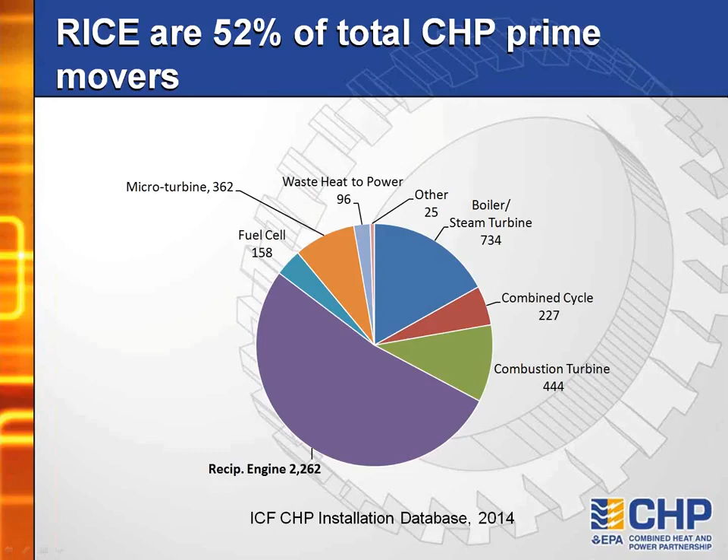As you can see from this slide, reciprocating internal combustion engines, which we'll refer to as RICE today, are over half of the CHP prime movers currently in operation. We have learned from our stakeholders that there's a high level of interest in EPA's regulations covering these engines. I also want to thank my EPA colleagues who will be making today's presentations, and I'll be introducing them one by one later. We have Roy Crystal, Melanie King, and Susan Lancy.

Today we'll be starting with Roy Crystal, from EPA's Region 1, who will talk about how EPA air quality regulations affect combined heat and power facilities. He'll be followed by Melanie King from EPA's Office of Air Quality Planning and Standards, who'll talk about the regulations for stationary RICE. That'll be followed by a question and answer session moderated by Susan Lancy from EPA Region 1, who also will probably be answering some of the questions. Then Roy Crystal will come back to talk about how combined heat and power facilities can comply with the EPA air quality regulations for stationary RICE, followed by a final question and answer session, again moderated by Susan.

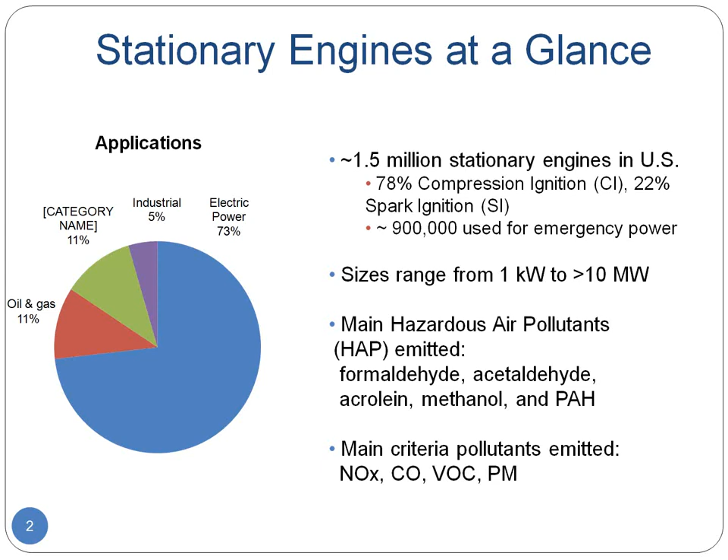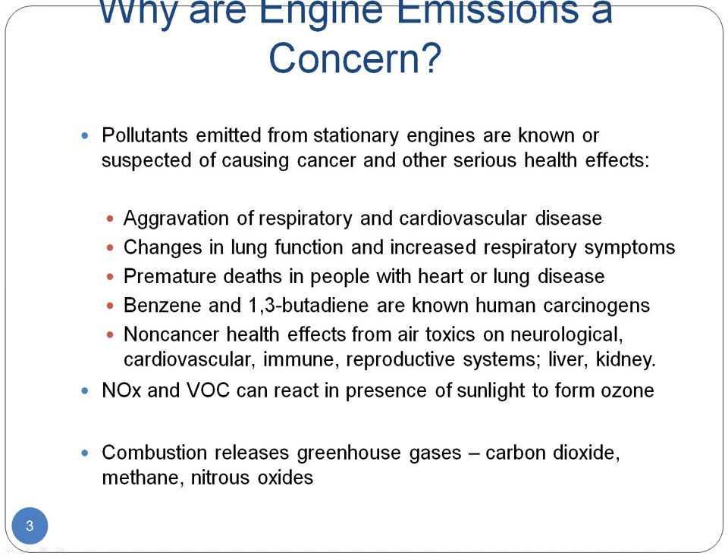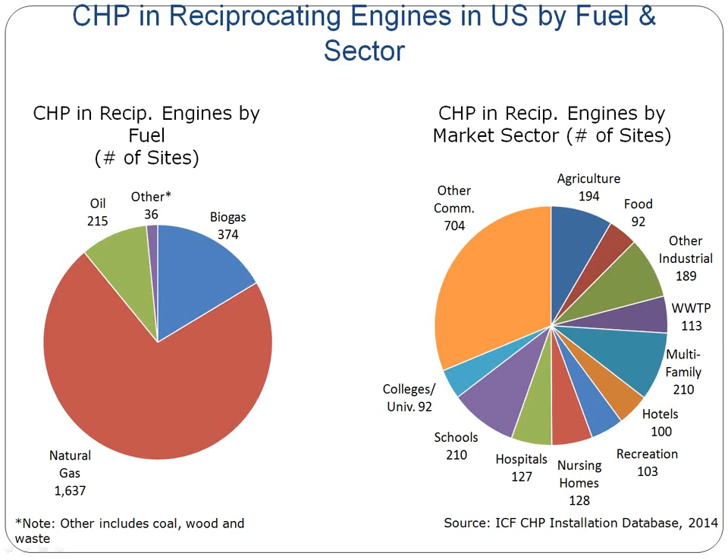So next slide, please. So how does that create an issue? Why is there something that you need to take your time today to learn about? We know that RICE are common prime movers for combined heat and power units, and we have these relatively recent stationary RICE regulations.

These apply to you if you have a RICE as the prime mover for your CHP unit, and these are relatively recent regulations. In the process of project development, facilities and consultants are used to dealing with states and going through permitting processes and talking about the air quality requirements for the facility. But they may not be that familiar with the RICE regs, which have really been coming into play over the last 7 or 8 years.

So it's possible that some of the requirements here may not have been attended to. You may not have known about them, or your consultant might not have known about them, and it's possible that you may be out of compliance. Some of the engines that are used need emission limits, need to have controls on them, and do things like performance testing and submit notifications to EPA. If that is your situation, it's a cause for concern, but we're here today to show you what to do to come into compliance with the regulations, and you may well learn that you are in good shape.

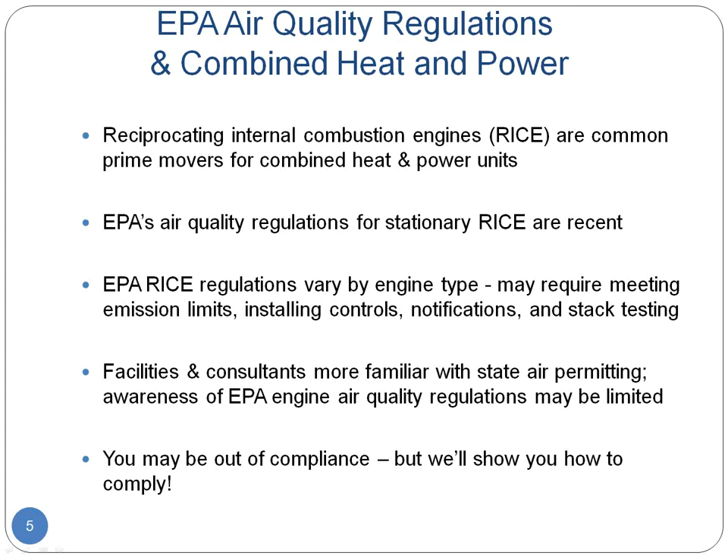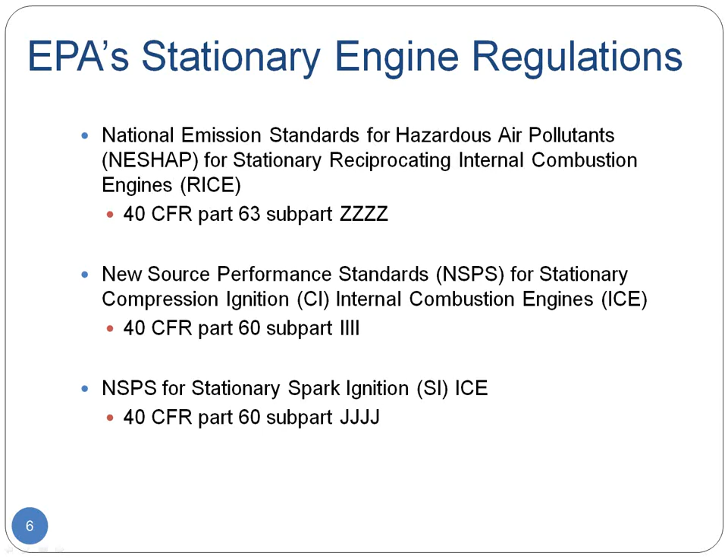Next slide, please. So there are 3 basic regulations that are part of our RICE regulations. The first is what we call the NESHAP, National Emission Standards for Hazardous Air Pollutants for stationary RICE. And then there are 2 new source performance standards, one for what we call compression ignition, CI or diesel engines, and one for spark ignition or SI engines. Next slide, please.

Let me give you an overview of these regulations. The first one, the RICE NESHAP, is probably the most sweeping. It regulates hazardous air pollutant emissions from stationary RICE at both major and area sources of hazardous air pollutants, which are listed in the 1990 amendments to the Clean Air Act. There's a couple hundred of these hazardous air pollutants, and all sizes of engines are covered, both new and existing RICE. So it's pretty sweeping. However, with the newer engines, it defers to the new source performance standard.

We've worked to bring these two sets of regulations together, and you'll be hearing from Melanie King, the rule writer for these regulations. She'll explain how they fit together. The new source performance standards really cover the new, modified, and reconstructed sources. They don't cover existing sources, and they cover the criteria pollutants, like nitrogen oxides, not the toxics. They begin to phase in for different types of engines starting in 2005. Over time, as more new engines are put into play at CHP units and elsewhere, the new source performance standards will become more pervasive. Right now, there's a big backlog of existing engines regulated under the NESHAP.

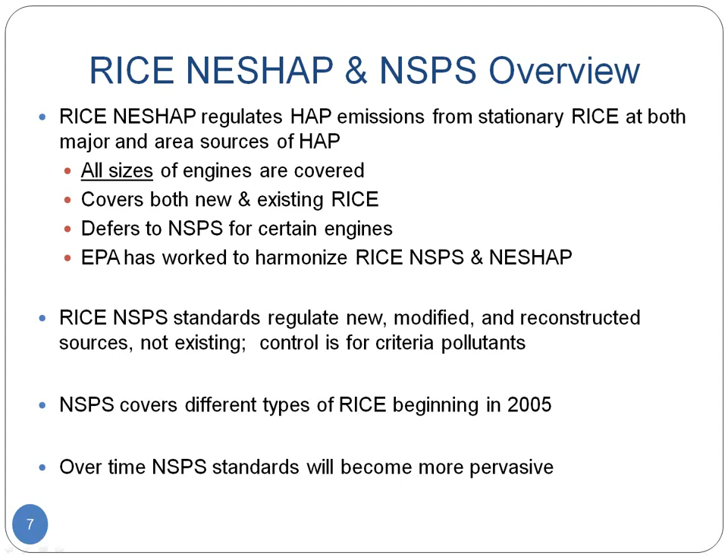Next slide, please. So what are the possible uses of RICE, or reciprocating engines, at a facility that has a CHP unit? Well, the first and obvious one is it may be the prime mover for that CHP unit, the thing that produces the energy. In our RICE reg world, that's a non-emergency use, because you want that CHP unit running pretty much all the time to be cost effective.

But as a facility, you may have engines you use for other things, so we're not just going to focus on CHP today. We're going to give you the broad sweep of our RICE regs. Most of you probably have an emergency generator — remember from the first slide, that was the most common use — used for generating backup power in an emergency. Our EPA RICE rules, for the first time, bring out a kind of national uniform framework for use of emergency generators, and we're going to tell you what those require.

A third circumstance is somebody may be paying you to use your generator. In our lingo, that's a financial arrangement for use of the engine, and there are a couple of different flavors of that. It may be used for what's called peak shaving, which is really load management — economic or situational — or for emergency demand response, which is close to a blackout situation, as Melanie will explain more, or for situations to foster local grid reliability.

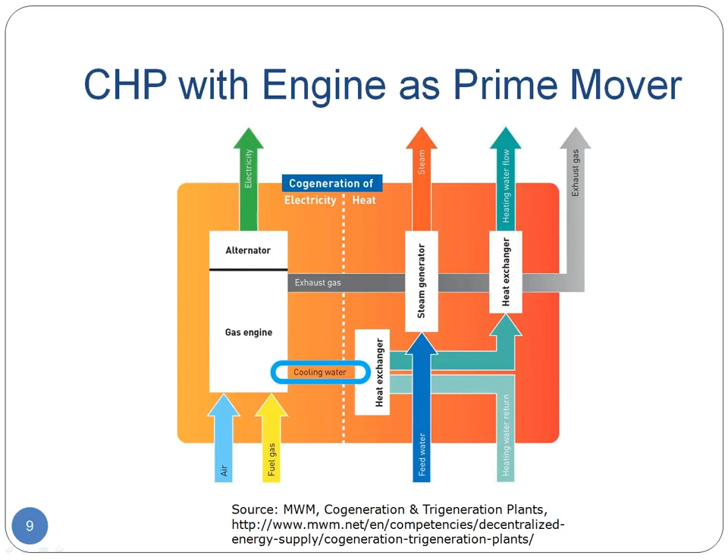So with that, that's kind of an introduction. Melanie King is now going to talk to you about the specifics of these regulations, so we'll switch the screen over to Melanie. And I'm just going to briefly introduce Melanie.

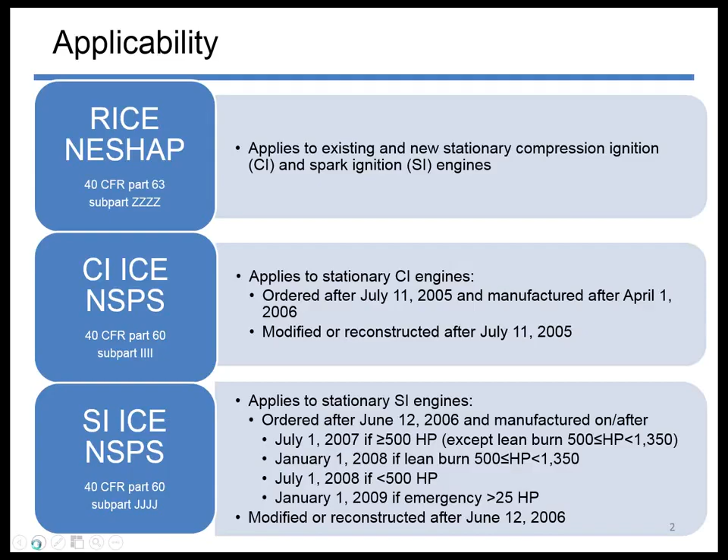What do we mean when we say stationary? We're basically talking about things that are not mobile. So our stationary engine regulations apply to things that are not mobile, and mobile means things used in motor vehicles, and mobile non-road equipment. Most people know motor vehicles, but mobile non-road engines would be anything self-propelled, like a tractor, propelled while performing its function, like a lawnmower, or anything portable or transportable, meaning it's on a trailer or a skid. If an engine falls into one of those three categories, it's considered a mobile non-road engine and would not be subject to our stationary engine requirements.

The way the regulation is written, it says if an engine is used in or on a piece of equipment that is self-propelled, for example. So if you have an engine mounted on equipment that's self-propelled, even if the engine is not actually doing the propelling, the fact that it's on a piece of equipment that is self-propelled means it's generally considered to be a mobile non-road engine.

One thing to keep in mind for that third category, the portable or transportable engines: if the engine remains in the same location for more than 12 months, or for the full annual operating period of a seasonal source, then it will be considered a stationary engine. And it will be considered stationary from the time it started remaining there, from the beginning of the 12 months - it doesn't become stationary only once it stays there for 12 months.

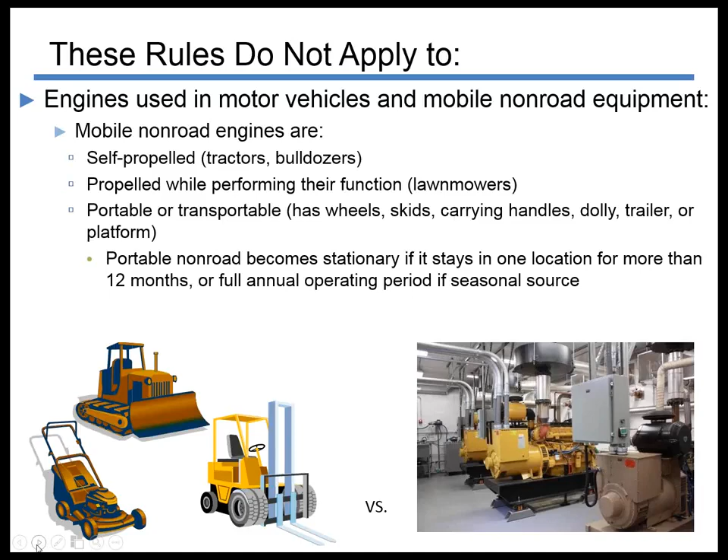So I'm going to talk about the three different regulations, and I'm going to start first with the NESHAP.

Just to give you a little background, the NESHAP regulates emissions of hazardous air pollutants from engines at both major and area sources of hazardous air pollutants. A major source is a facility that emits 10 tons or more per year of a single HAP, or 25 tons or more per year of combined HAP. It wouldn't just be the engines that we'd look at to consider if something is a major source—it's all the stationary emission sources at the facility. So if an engine is located at a refinery or a power plant, you'd look at the emissions from all the emission sources there when determining whether a facility is major or area source. An area source is any source that's not a major source.

So if you're not a major source, you're going to be an area source—you'll fall into one or the other category. Even if all you have at your facility is the stationary engine and no other HAP emission sources, you're going to be an area source. So if you've got a stationary engine, you're going to, at a minimum, be an area source. My thinking is that most of the engines used for CHP are probably going to be located at area sources. So what we're going to focus on today for the NESHAP is the requirements for engines at area sources, but I did put some slides at the end as an appendix that cover requirements for engines at major sources.

The rule does cover all sizes of engines. There's no threshold below which an engine would not be subject to the rule. The only stationary engines not subject to the NESHAP would be existing emergency engines located at residential, institutional, or commercial facilities that are area sources, provided the engine is used or obligated to be available less than 15 hours per year in financial arrangements such as an agreement with a utility for emergency demand response or voltage frequency deviations, and not used for local reliability. Some folks have been a little confused about that language.

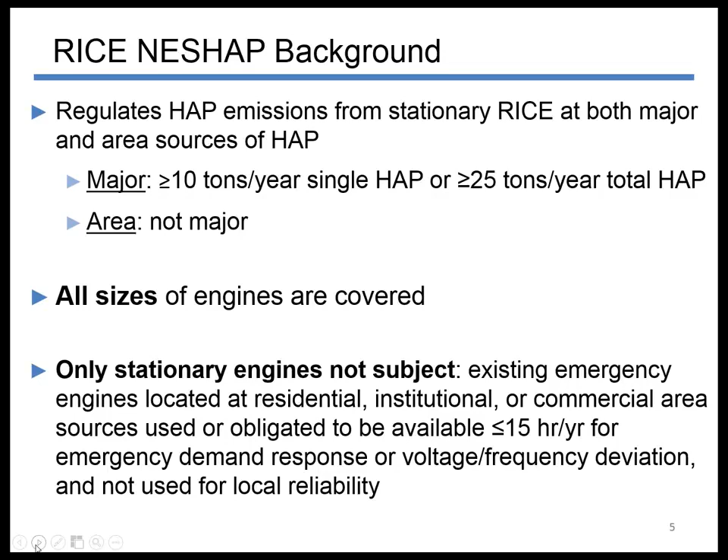The requirements in the rule differ for engines depending on things such as the category of the engine—like Roy was talking about, lean burn, rich burn—and the size of the engine, and also whether the engine is considered existing or new. For engines greater than 500 horsepower at major sources, it's existing if construction commenced before December 19th, 2002. If the engine is less than or equal to 500 horsepower at a major source of HAP, or any size at an area source of HAP, it's existing if construction commenced before June 12th, 2006.

The way we define construction actually defaults to a definition in subpart A of part 63. I've paraphrased it here, but it's essentially when the owner-operator of the engine has entered into a contractual obligation for the on-site installation of the engine. That would be the construction date of the engine.

Note that the definition says construction does not include removal from one existing location—I'm paraphrasing—and moving it to a new location. So if you have an engine at a facility that's been operating there, and you pick it up and move it to another facility, with or without a change in ownership, that doesn't change the construction date of the engine. You need to look at the date construction commenced when it was a brand new engine.

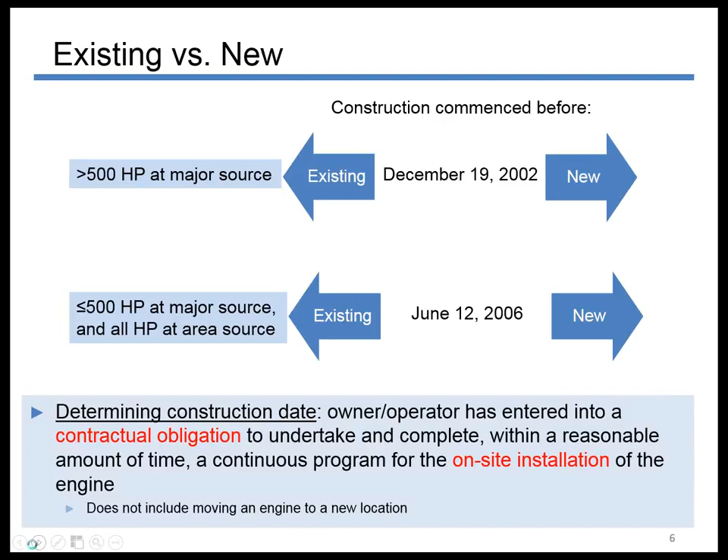So that's a little bit of background. Now I'm going to go into the specific requirements, and I'm going to start with the non-emergency engines at area sources of hazardous air pollutants.

But there is a CO standard for compression ignition engines above 300 horsepower - either a parts per million or a percent reduction standard. And for spark ignition four-stroke engines above 500 horsepower that are not in remote areas, if the engine is used more than 24 hours per year, we have what we call an equipment standard.

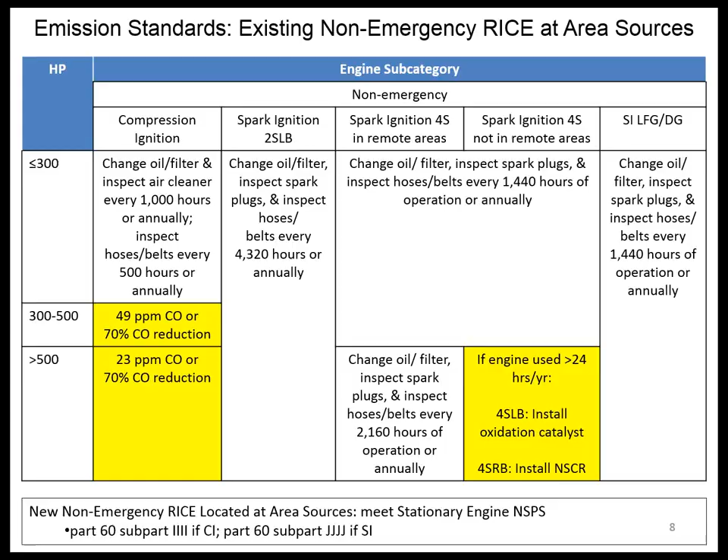So those were the emission standards. Here are the compliance requirements. If you have one of these existing non-emergency compression ignition engines above 300 horsepower that is subject to a CO limit or formaldehyde, percent reduction or ppm limit, you will have to do a performance test.

You have to do an initial test, and if your engine is above 500 horsepower, you have to do a subsequent test every 8,760 hours of operation or 3 years. Or if you only use your engine less than 100 hours per year, the interval can be 5 years.

In addition to the testing, you will have operating limitations on your engine. The rule specifies that the catalyst pressure drop and the catalyst inlet temperature have to stay within a certain range. You have to do a monthly check of the catalyst pressure drop, and you have to continuously monitor your catalyst inlet temperature, if your engine is above 500 horsepower.

You also have to submit some notifications to EPA or, in some cases, your state or local air pollution control agency. You have to submit semi-annual compliance reports - again, if you have a limited use engine, you can do those annually. The engine has to use ultra-low sulfur diesel, and there are also some crankcase emission control requirements.

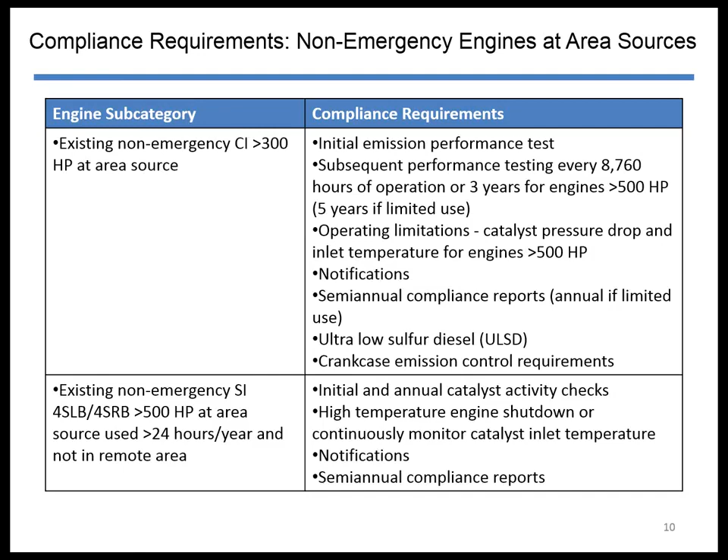If you have one of these existing spark ignition 4-stroke engines above 500 horsepower at an area source that's not in a remote area, these are the engines that have to meet the equipment standard to install a catalyst. You would have to do an initial and an annual catalyst activity check.

You have to equip the engine with a high temperature engine shutdown or continuously monitor your catalyst inlet temperature, and you will also have to do notifications and compliance reports. If you have one of the engines only subject to what we call the management practices, essentially the maintenance requirements, change the oil, inspect hoses, belts, etc., I've listed these engines here. What you need to do for those engines is just operate and maintain the engine per the manufacturer's instructions or your own maintenance plan.

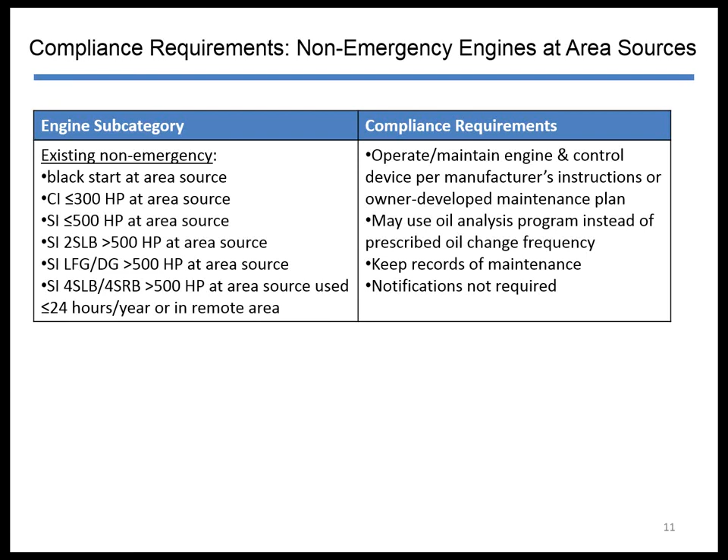You can use an oil analysis program instead of changing the oil on the prescribed frequency. You have to keep records of maintenance. You do not have to submit notifications to EPA. This is a little more information about the oil analysis program.

The rule specifies certain parameters, and then at whatever interval the rule specifies for your oil change—say, 1,000 hours—you would do that analysis at or before the 1,000 hours, and look at these parameters. If the condemning limits had not been reached, then you would not need to change the oil, and you would go to the next interval and do the analysis again, and so on.

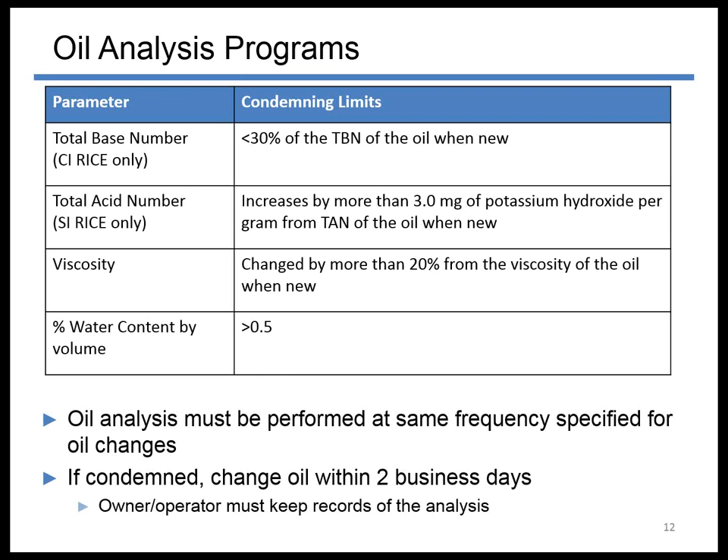Once you do reach the condemning limits for the oil, the rule specifies that you have to change the oil within 2 business days, and you do need to keep records of the analysis. So those are the requirements for non-emergency engines.

Those are by no means the only situations where an engine can be operated and be considered an emergency engine—those are just some examples. We also say that the engine must limit its operation in non-emergency situations as specified in the rule to be considered an emergency engine. Here's some more information about that—these are the limits that are in the rule.

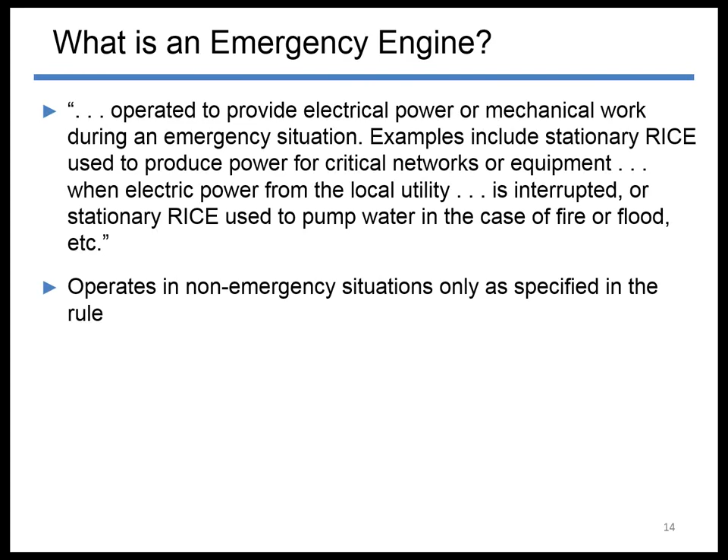There's no limit on the operation in an emergency situation. So if an ice storm comes and takes out the power lines, or a hurricane, or an earthquake or something like that, there's no limit on operating the engine in that type of situation. Then there's a limit of 100 hours per calendar year that can be used for maintenance and readiness testing of the engine.

You can use the engine for emergency demand response if an energy emergency alert level 2 has been declared by the reliability coordinator. That was the operating in a financial arrangement type of situation that Roy mentioned. You don't have to use your engine for emergency demand response in order to be considered an emergency engine. We're just saying that if you do use it in a financial arrangement, you have to keep it under these limitations in order to be considered an emergency engine.

So there's emergency demand response, and then there's the voltage or frequency deviations of 5% or greater below the standard. We also say that up to 50 of that 100 hours per calendar year can be used for a couple of different things, one of which is non-emergency situations if there's no financial arrangement. An example would be some folks wanting to turn on their engines if there's a storm in the area.

Because they don't want any sort of blip in the power, it's sort of a just-in-case the power goes out type of thing. Our view has been that this doesn't really seem like an emergency situation, but it would be allowed for up to the 50 hours per year for non-emergency situations. So there's that category, and then there's this other type of financial arrangement.

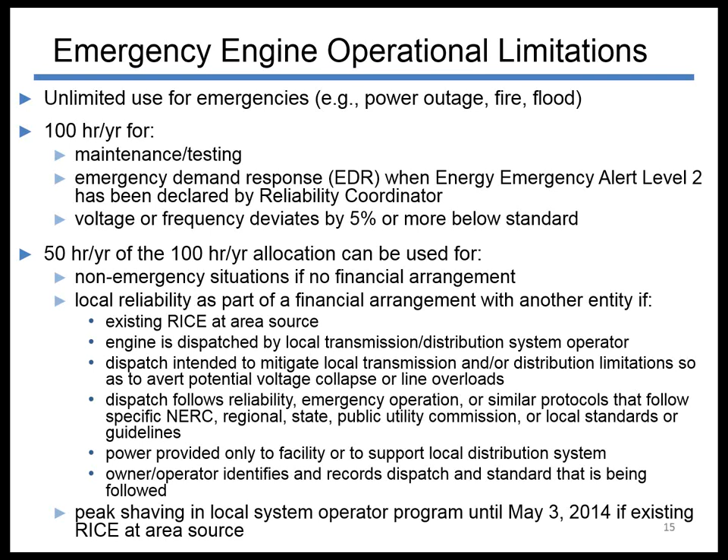We do have some compliance requirements for these engines. We have maintenance requirements similar to what we talked about for non-emergency engines: change the oil, inspect hoses and belts every 500 hours or annually, inspect the air cleaner or spark plugs every 1,000 hours or annually, whichever comes first. Again, you can use an oil analysis program. You have to operate and maintain it per the manufacturer's instructions, minimize your time spent at startup and idle. You do need to have a non-resettable hour meter and keep records of your hours of operation and maintenance. Again, notifications are not required for these engines.

If you have a new engine, similar to what we talked about for non-emergency engines, you need to meet the NSPS, and that's your only requirement under the NESHAP.

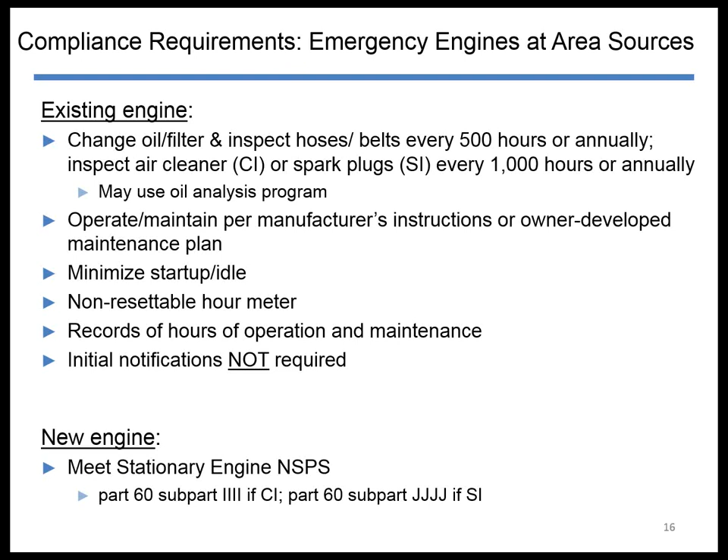We do have fuel requirements for certain emergency engines. If you have an emergency compression ignition engine above 100 horsepower, less than 30 liters per cylinder displacement, and you are operating that engine in a financial arrangement for emergency demand response, voltage frequency deviations, or local reliability, then beginning January 1st of 2015, you are required to use ultra-low sulfur diesel fuel in the engine. We did specify that any existing inventory you have on hand beginning January 1st of 2015 can be depleted.

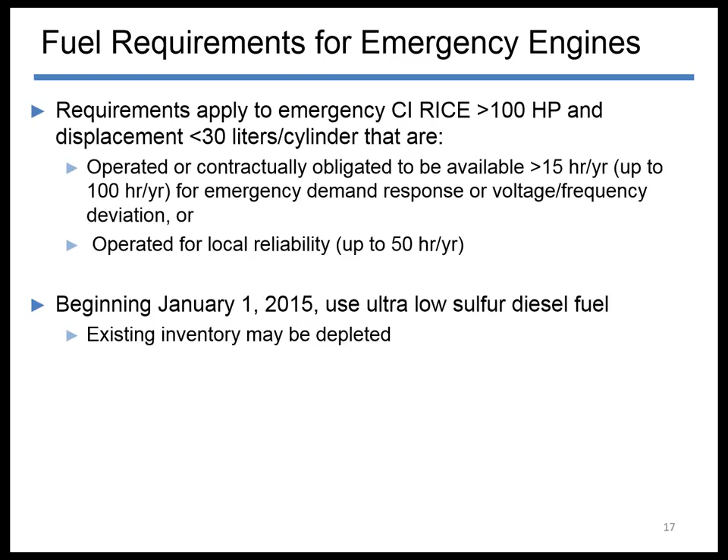In addition to fuel requirements, for those same emergency engines being used in financial arrangements for emergency demand response, voltage frequency deviations, or local reliability, if that engine is above 100 horsepower, we have a reporting requirement that begins with operation in the year 2015. You're going to have to report to us information like the facility name and address, the dates and start and end times you operated for these situations, and several other things. So the first report will have to be submitted by March 31st of 2016, then March 31st of 2017, and so on.

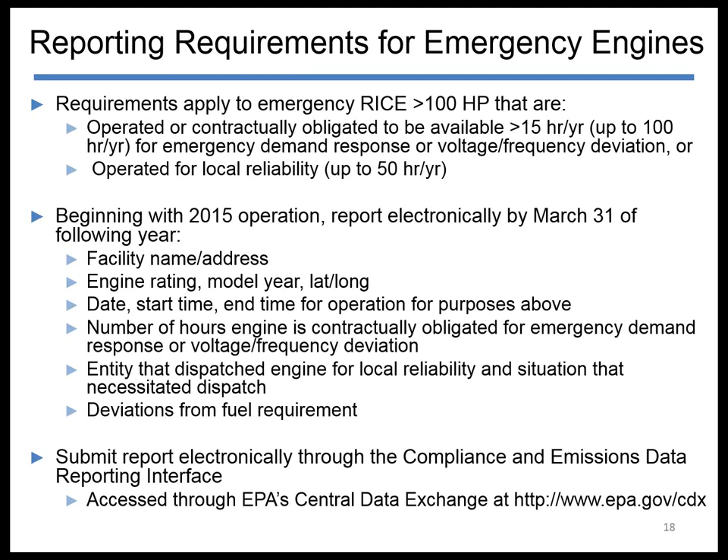We are setting up a way that you would be required to submit it electronically through our electronic reporting interface. We're still working on getting that set up, but the plan is to have that all set up by the end of this year so that we'll be ready to go when 2015 and 2016 roll around. So those are the reporting requirements.

Some key dates: if you do have an engine where an initial notification was required, it's not required for all of the engines, but it is for some, generally those that have to submit or that are subject to a CO limit. We're well past the date for submitting those initial notifications; that was in 2010 or 2011. The compliance dates...

For the existing engines located at area sources of hazardous air pollutants, the compliance date for compression ignition engines was May 3rd of 2013. For spark ignition, it was October 19th of 2013. So if you're just now realizing that you have an engine that may be subject to these requirements, be aware that the compliance date has passed, so you need to come into compliance as soon as possible. If you have a new engine, then you do have to comply upon startup.

So that's an overview of the NESHAP.

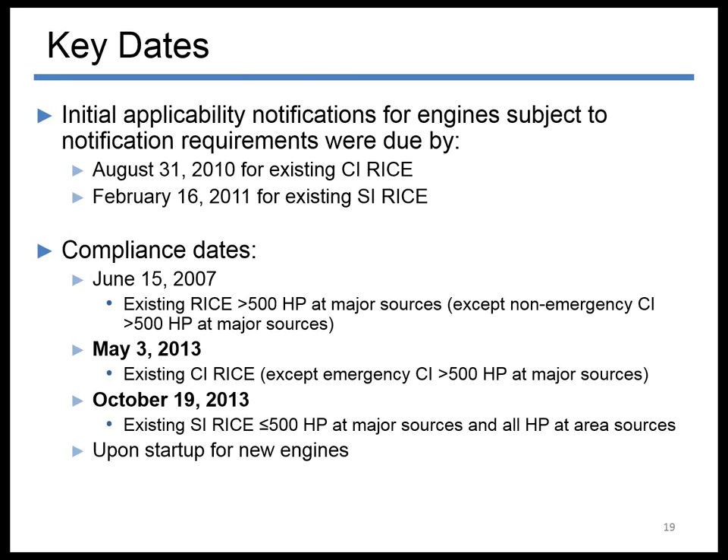I'm going to move now into the NSPS for compression ignition engines. The applicability of this rule: it applies to owners and operators of stationary compression ignition engines that were ordered after July 11th, 2005 and manufactured after April 1 of 2006, or July 1 of 2006 if it's a fire pump engine.

One thing I wanted to draw your attention to is that in the NSPS we define construction differently than we did in the NESHAP. If you remember, in the NESHAP it was when the owner or operator entered into a contractual obligation for the on-site installation. In the NSPS, we define construction as the date the engine was ordered.

So it applies to those newly manufactured engines, and then it also applies to older engines that are modified or reconstructed after July 11, 2005. Modification, in simple terms, is when you've increased the emissions of a regulated pollutant. Reconstruction is if you replace enough components of the engine such that the cost of the new components exceeds 50% of the cost of a comparable entirely new engine.

There's more regulatory text associated with modification and reconstruction. If you want to review that, it's in subpart A of part 60. There are a lot more qualifications and things like that, but it's in subpart A of part 60.

So the rule applies to both the owners and operators, and then it also applies to engine manufacturers - manufacturers of 2007 model year and later stationary compression ignition engines. The regulatory definition of manufacturer is any person who manufactures an engine for sale or otherwise introduces it into commerce, and it does include importers who import stationary engines for sale or resale.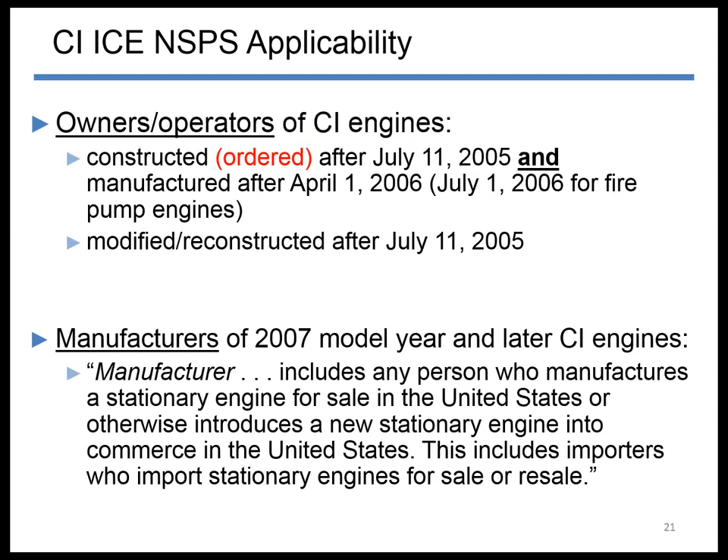So if you're buying new engines, they should be labeled, and they should have a certificate of conformity. We don't post the certificates on our website, but we do post some spreadsheets that list all the engine families that were certified by model year, so that information is available. So that's the requirements for manufacturers.

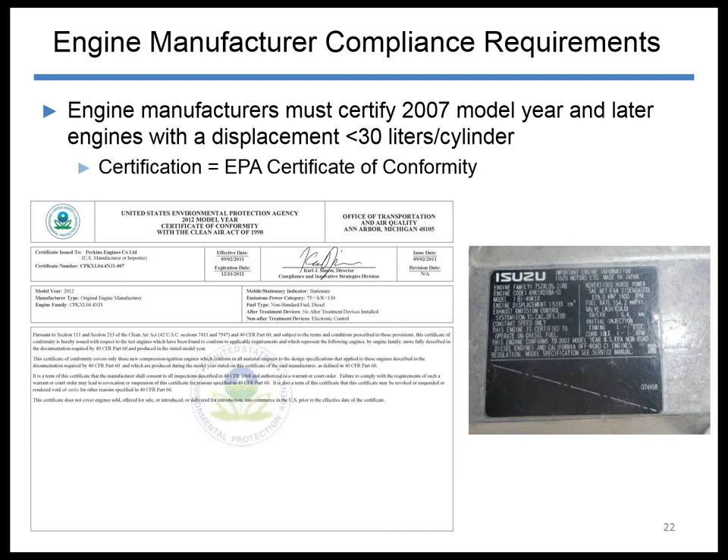For owners and operators, if you have a 2007 model year and later engine, you need to be purchasing an engine that's certified - again, certified meaning Certificate of Conformity from EPA. And it needs to be certified to the emission standards that apply to that engine based on its model year, its size, and its application, meaning emergency or non-emergency.

So if you are buying one in the 2007 to 2010 model year, it has to meet what we call the Tier 3 standards - those are for CO, hydrocarbons, NOx, and particulate matter. If you're buying one in the 2011 to 2013 model year, it has to meet at least our Tier 4 interim standards - again, CO, hydrocarbon, and NOx didn't change, but the PM standard is tighter. And if you're model year 2014 and later, the engine needs to meet our Tier 4 final standards - CO doesn't change, but the PM, hydrocarbon, and NOx are lower.

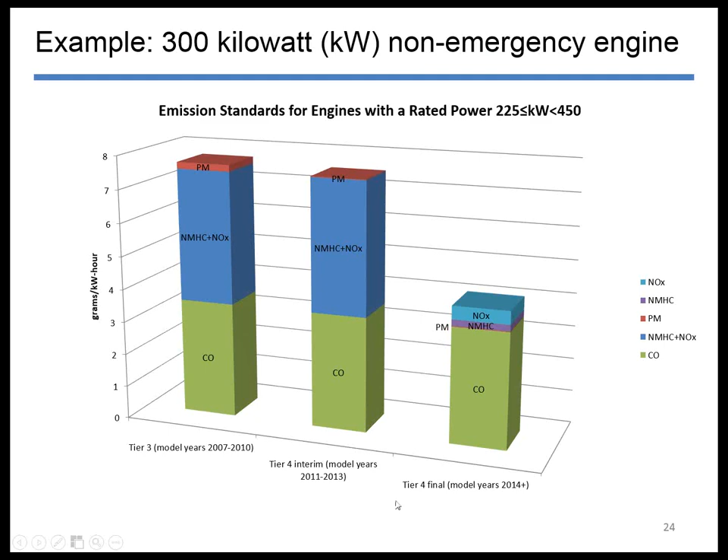So if you hear the tier terminology, that's just what we call the standards - we call them the tier standards. So you need to buy a certified engine, and you need to install, configure, operate, and maintain it per your manufacturer's instructions. If you do that, you don't have to do any performance testing to show that the engine complies with the standards. If you elect to operate the engine differently than the manufacturer's recommendations, you do need to do a performance test to show that the engine complies with the standards.

One example of something you could do would be, I've heard folks are taking compression ignition engines and putting what they call bi-fuel kits or dual fuel kits on them that would allow the engine to operate on diesel fuel as well as natural gas. So if you do that to your engine, it's no longer in the configuration that was certified by the manufacturer.

So you're going to fall into operating differently than the manufacturer's recommendations, and you have to do a performance test to show compliance.

The last requirement I listed is that these engines have to use ultra-low sulfur diesel fuel. We have requirements in the rule for engines built from 2007 model year and later, since that's the most common. We also have requirements for engines built from April 1 of '06 to the end of '06, engines with a displacement greater than 30 liters per cylinder—those are really huge engines—and also modified or reconstructed engines. I didn't go over those, but just be aware there are requirements.

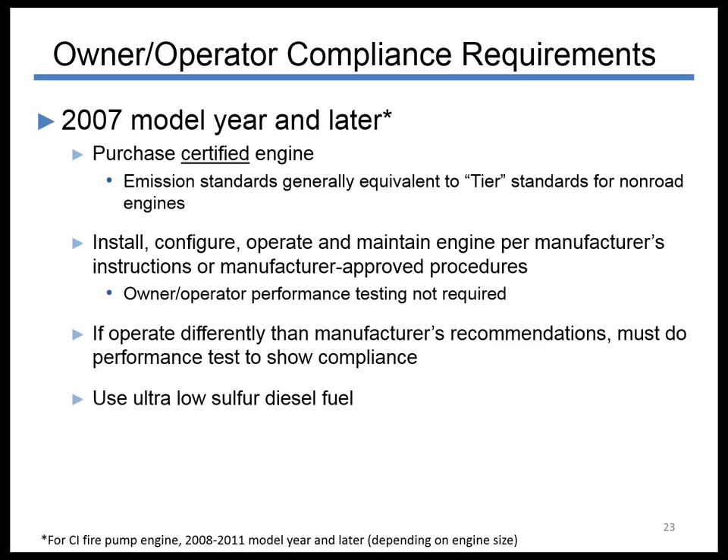So if you have one of those engines, you can check the rule for the requirements. There are monitoring, record keeping, and reporting requirements. If you have an emergency engine, you have to have a non-resettable hour meter and keep records of the hours

of operation if the engine is certified as emergency use only. If you have an engine with a diesel particulate filter, what we call a DPF, you have to have a back pressure monitor and keep records of any corrective actions.

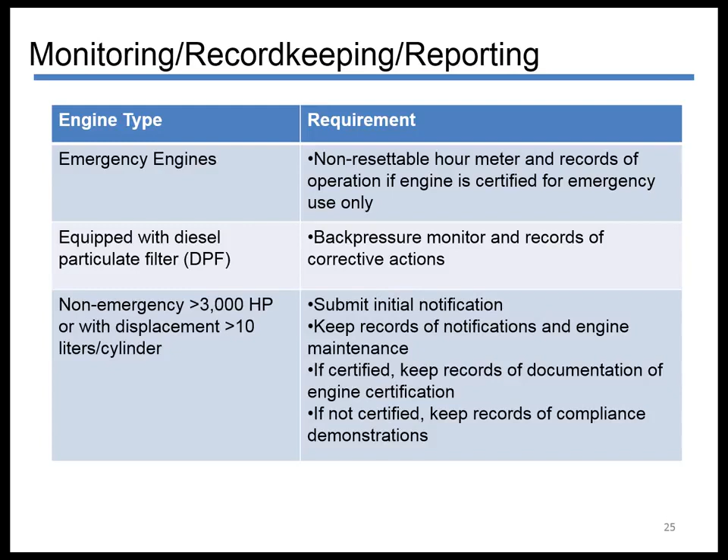If you have a non-emergency engine above 3,000 horsepower or with a displacement greater than 10 liters per cylinder, you have to submit an initial notification, keep records of that and the engine maintenance. If it's certified, keep those records, and if it's not certified—which would potentially be your 2006 model year engines, since they weren't required to be certified—you would have to keep records of whatever compliance demonstration you use for that engine. So that's the requirement for compression ignition.

I'm going to go over the spark ignition engines, and again, that would be your natural gas, gasoline, LPG, propane, landfill and digester gas engines.

This rule applies to owners and operators of spark ignition engines constructed, and again that's defined as ordered after June 12th of '06, and manufactured after the date specified in the rule for the particular category of engine. So if it's a lean burn engine, 500 to 1350 horsepower, if it was manufactured after January 1 of '08 and constructed after June 12th of '06, it's subject to the rule.

And for older engines, if they're modified or reconstructed after June 12th of 2006, they also become subject to the rule. This rule is a little bit different than the compression ignition engine rule, because with the compression ignition rule, almost all engines are required to be certified by the manufacturer.

Here, engine manufacturers are only required to certify spark ignition engines if they're less than or equal to 25 horsepower, or if they're greater than 25 horsepower and they're gasoline or rich burn LPG engines. But that leaves a whole group of engines, like natural gas engines above 25 horsepower, that manufacturers are not required to certify. I think they are certifying some, but certainly not all of the engines.

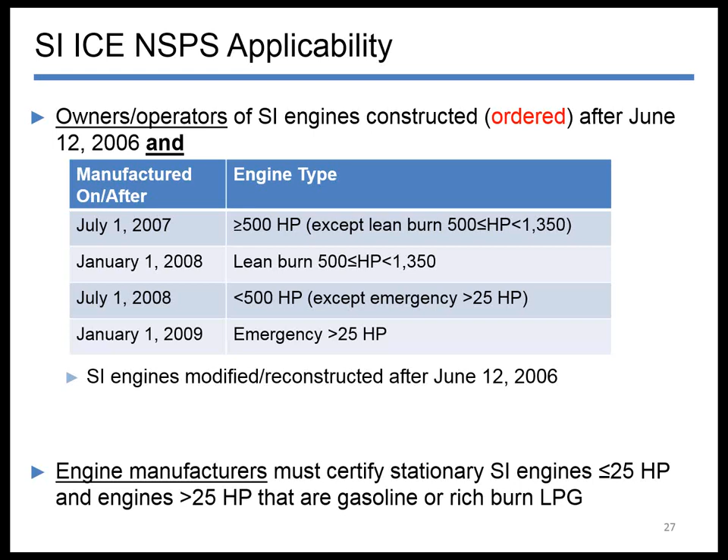Just in general, I actually find this regulation to be the most complicated. I know a lot of folks think the NESHAP is, but I find this one to be. So the emission standards, again, depend on the type of engine you have.

If it's less than 25 horsepower, the rule's going to say meet the standards that are in Part 90 or Part 1054 that we adopted for non-road engines. So we just point to standards for a comparable non-road engine and say meet those standards.

If they're non-emergency gasoline or rich burn LPG engines, or natural gas and lean burn engines 25 to 100 horsepower, our regulations point to the standards in Part 1048 and say meet those standards. If it's above 100 horsepower and it's not a gasoline or rich burn LPG engine, then the regulation says meet the standards in Table 1 of Subpart JJJJ. They're basically NOx, CO, and VOC standards.

You have the option of meeting either a grams per horsepower hour or a ppm standard, and there's a different standard depending on the model year. I think we did something kind of similar to the tiers, but we basically only have two tiers. For example, model years 2008 through 2010 have one tier, and 2011 and later have another. So that's what's in Table 1.

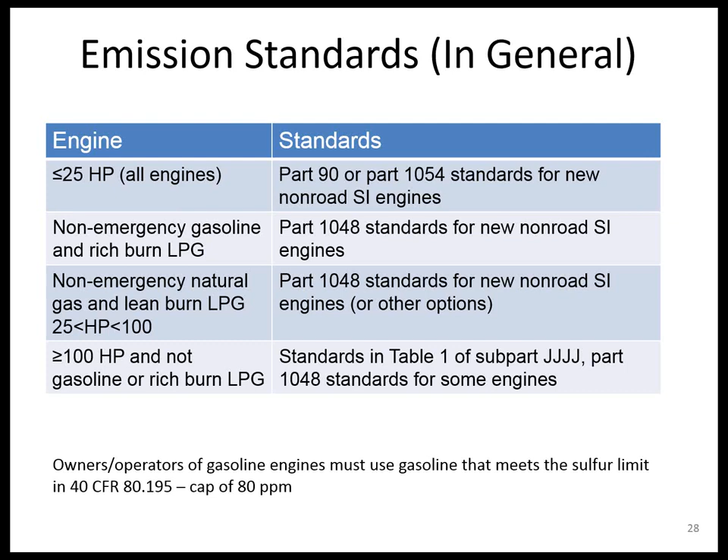In terms of compliance requirements, if you have an engine certified by the manufacturer, say it's less than 25 horsepower, similar to what we require for diesel or compression ignition engines, you have to install, configure, operate, and maintain it according to the manufacturer's instructions. If you elect not to operate and maintain it according to those instructions, you have to have a maintenance plan and operate consistent with good air pollution control practices.

If it's 100 to 500 horsepower, you have to do an initial performance test to show the engine still meets emission standards, and if the engine is rebuilt or undergoes major repair or maintenance, you have to retest in addition to the initial test. If it's above 500 horsepower, you have to do an initial test and subsequent testing every 8,760 hours or 3 years, whichever comes first. That's the requirements for engines originally certified by the manufacturer.

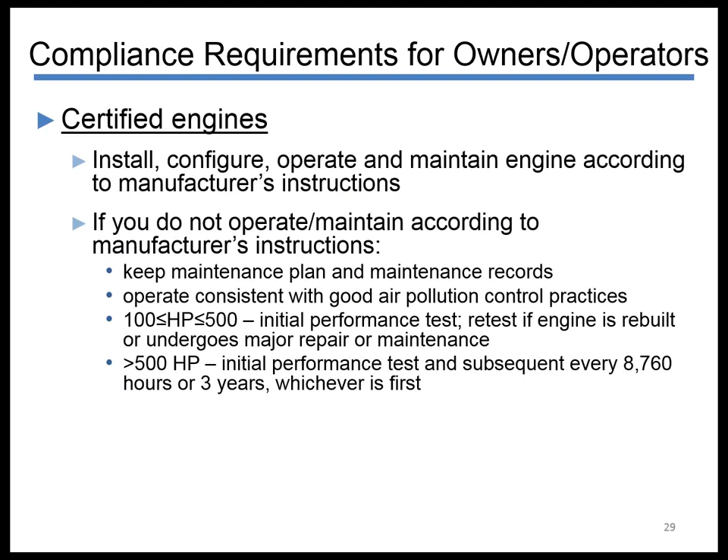If you have an engine that was not originally certified by the manufacturer, you have to have a maintenance plan and do performance testing. From 25 to 500 horsepower, you do an initial test and retest if it's rebuilt or has major maintenance. Above 500 horsepower, you do an initial test and then subsequent testing every 8,760 hours or 3 years, whichever comes first. That test does have to be done at high load conditions.

In terms of monitoring, record keeping, and reporting: a non-resettable hour meter, again for emergency engines, documentation if it's certified, and any records of maintenance. If it's an engine that's not certified and above 500 horsepower, you have to submit an initial notification. And if it's an engine for which you have to do performance testing, you have to submit those results to us within 60 days of the test.

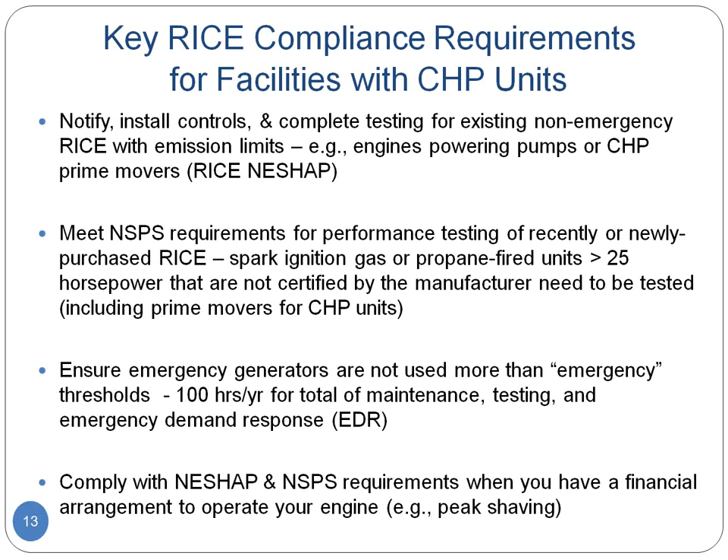So classifying your engines in terms of the key factors, we've been over these. Horsepower is a key factor, as well as the date constructed or reconstructed. You're going to need the hours of use, which means you have to start, if you haven't already, tracking your engine hours of use, or look it up. The annual hours of use in emergency and non-emergency situations, and for maintenance and testing.

You may not have been looking at this data. You've got to go out and get it. And you're going to have to look at your contract obligations and the hours of use in any financial arrangements you have for being paid for using your engine.

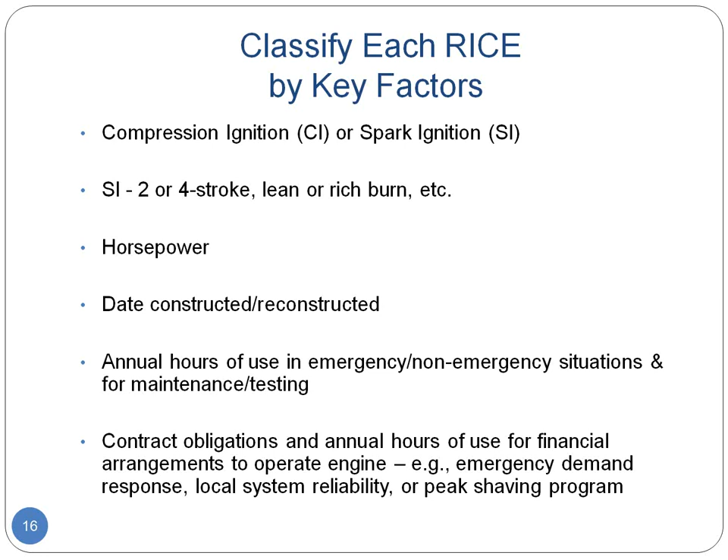Melanie mentioned how you determine if your source is major or area. A major source has a facility-wide potential to emit greater than or equal to 10 tons per year of any single hazardous air pollutant, or greater than or equal to 25 tons per year of combined hazardous air pollutants. For different sectors, we have guidance published at different locations on our website for how to calculate potential to emit, which is basically 24/7 use year round. If you are not within those major source categories, you're an area source, and that's what most of you will probably be.

So just reiterating again, the 3 or 4 circumstances that are key to be concerned about, especially if you have a CHP unit. Under the NESHAP, an existing non-emergency spark ignition 4-stroke RICE at an area source that's greater than 500 horsepower, so it's pretty big, and it's not in a remote area, has to install controls if it's used for more than 24 hours a year. That's the equipment standard Melanie spoke of. If it's a lean burn engine, it needs an oxidation catalyst, which is basically a catalytic converter. If it's a rich burn engine, it needs non-selective catalytic reduction, or NSCR. So bottom line, you might have to have controls on your engine in that circumstance with the CHP unit.

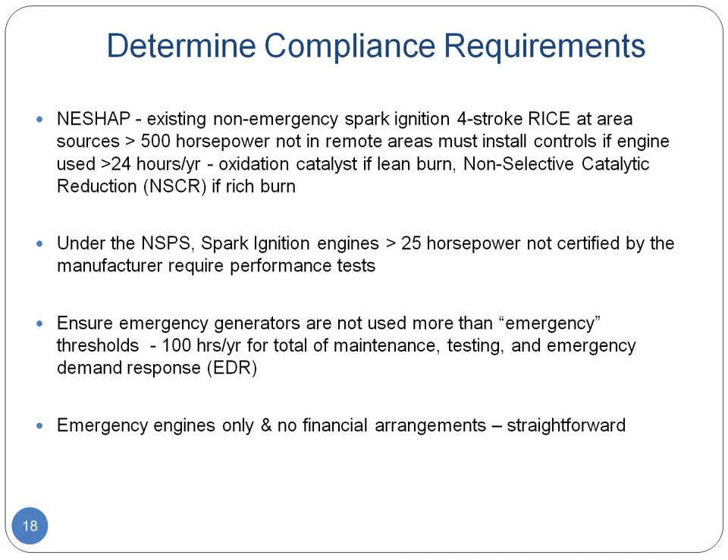When somebody is paying you to use your engine, things get a little more complicated. You have to figure out which of these different flavors of financial arrangement you have. It could be emergency demand response, which is basically a situation pretty close to a blackout. It could be peak shaving or load management, which is really more economic use of the engine, or a local reliability program. The way to find out is to read your contract.

The requirements will differ for each of these types of financial arrangements. Melanie mentioned that the allowance for 50 hours of peak shaving or non-emergency demand response for emergency engines at area sources has ended as of May 3rd, 2014.

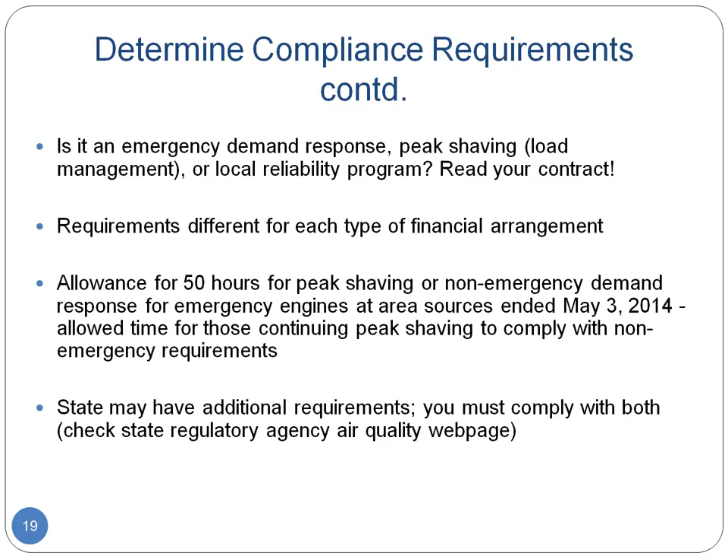So if you're doing peak shaving, you have a choice to make. If you want to continue with the peak shaving program with the utility, you're going to have to comply with the non-emergency requirements. We've been talking about the EPA air quality regs for engines here today, but states have been regulating engines for a long time, and you have to comply with both of those kinds of standards. A way to find that out is to check the state regulatory agency air quality webpage.

So we have developed a number of information sources on EPA compliance requirements. I was hoping to show you some of these after I get through the full presentation. We'll go to some of them. We've had a little problem with our computer here freezing, so I'm going to pretty much talk you through what is on the sites. And if we have time, we will show you one tool in particular, the regulation navigation tool.

The first one is epa.gov/region1/RICE. This is one we developed here in EPA Region 1. It's a user-friendly kind of guide to the RICE regs. Down the left-hand column, it shows a general description of the regulations, and we have boxes on the right-hand side with a variety of tools.

This PowerPoint from today will be posted on there. We have other PowerPoints from previous presentations. For instance, there's one that gives more information on performance or stack testing. And we have lots of links. You can download from there the initial notifications and notifications of compliance status forms.

We also have a link on there to the national RICE webpage. That one was updated earlier this year, around September, to be more user-friendly. It's got four tabs at the top on the National RICE homepage. One of them has all the Federal Register notices, since this rule has been amended and changed a lot, so you can go back through any of that regulatory history. Then there's a section called Implementation Information, a tab at the top, where most of these tools are. So you can go to a variety of things there and see those.

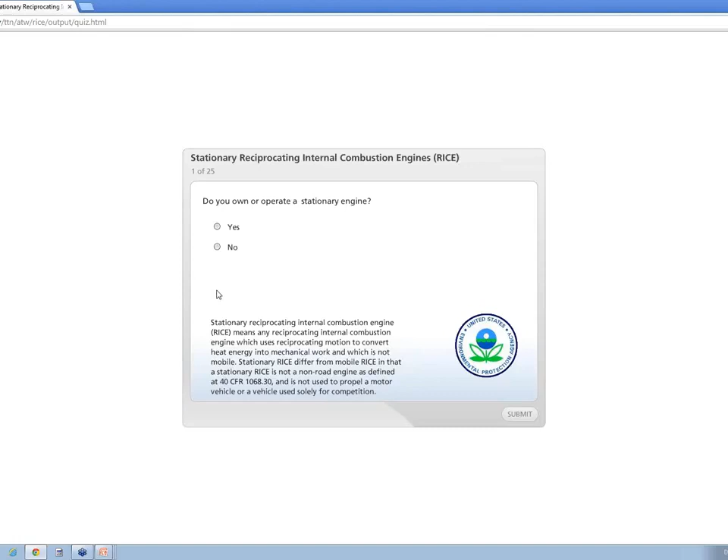And then it gets to the first question. Do you own or operate a stationary engine? We're going to say yes to fill in that box. Here's a special circumstance: is your engine being tested at a stationary RICE test cell or stand? Most of the time that's going to be no.

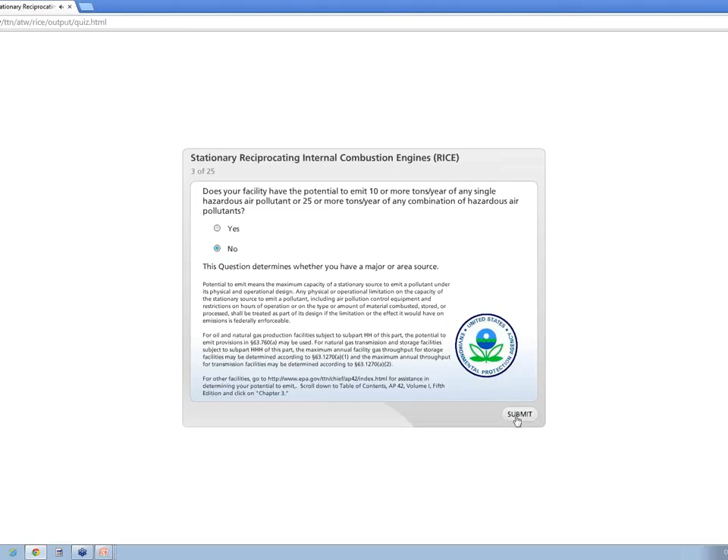Here's a question about potential to emit and getting at whether you are a major or area source. Do you have the potential to emit more than 10 tons of any single HAP or 25 tons combined? We're going to say no. And that shows you're an area source. So we'll go to the next prompt.

Did you begin construction or reconstruction on your stationary engine before June 12, 2006? We're going to say we're an existing engine, so we're going to say yes—an older engine.

Is it greater than 500 horsepower? We're going to say yes.

So here it gives you several different categories of engines, and we're going to select the non-emergency spark ignition four-stroke rich burn. That's like the fourth one from the bottom.

And what is the classification? Is this a remote or non-remote engine? We're going to say we're not a remote engine.

So now it brings you to a set of the actual standards. So we're going to click on that and open that up.

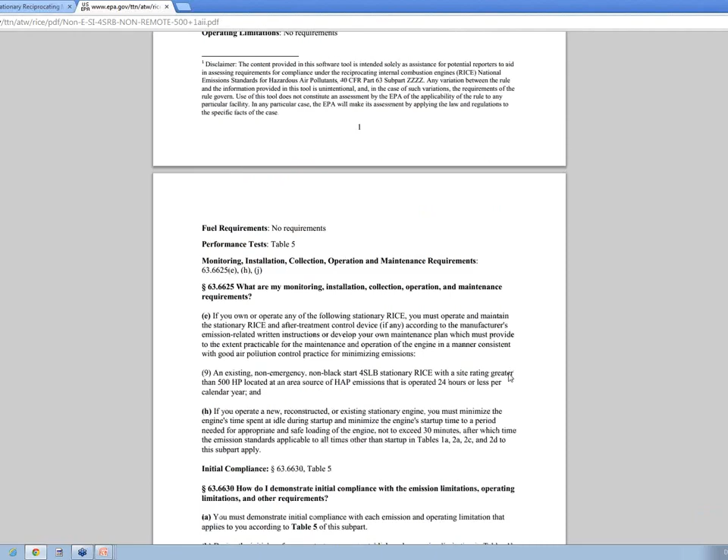I think the structure of this thing is worthwhile to go through, because you see the thinking underpinning the rule. There's different branchings within here, but if you can just find your way through this trail of breadcrumbs, you can find the regs that apply to you, and then you can go back to the eCFR or look in one of the posted PowerPoints and see the regulations that apply to you.

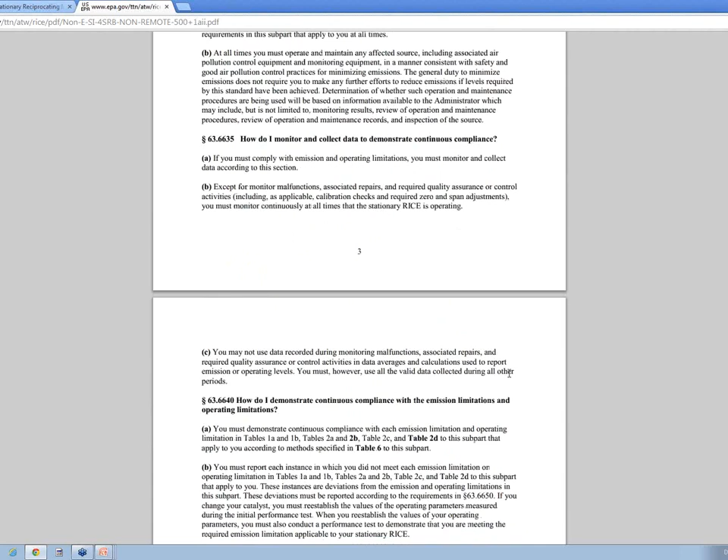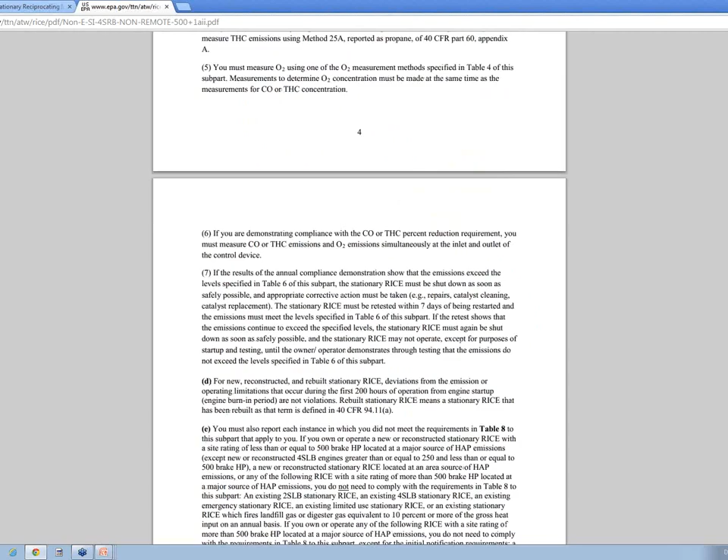So the one for the New Source Performance Standard has a very similar kind of structure. With that, I think we'll switch things over to Susan for the second set of questions and answers.

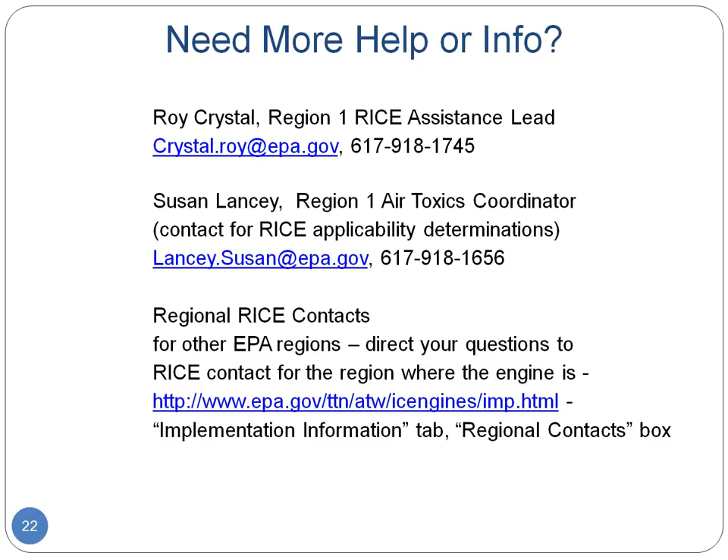Yeah, we could take a few minutes and show you some of those websites since we have a little bit of time. Sarah, are you able to, if I give you a URL, are you able to bring that up and I can just show them?

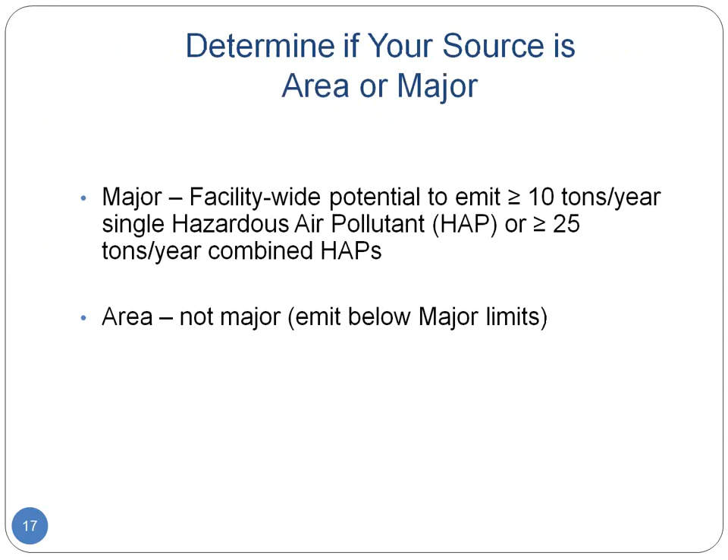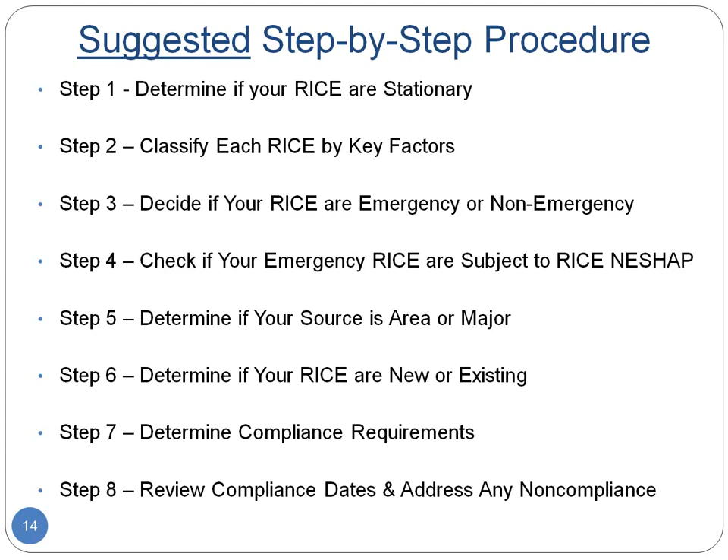Sure. If you go to my presentations, there's a live link at slide 18, information sources on your EPA compliance requirements. There's always the technology to be considered on this, and we appreciate you bearing with us. Our screen froze here. So I'm sorry, what slide is it? Slide 18, which says information sources on your EPA compliance requirements. There is a live link to epa.gov/region1/RICE in the first bullet. Okay.

Okay, we're showing the screen, the web page.

As you see here, we'll shrink this so I can see it better. We've got a little picture of the engine here, and a column on the left-hand side with basic headings and a plain language description. The boxes on the right, if you scroll down to the box that says Tools to Help You Comply...

You'll see a link to the Rice NESHAP homepage. Before we go there, I'll show you we have several PowerPoints listed there, and a little further down we have the forms you can use for initial notification.

It's the sample initial notification form about halfway down. We have the notification of compliance status, an area where we'll post new things. Up at the very top, we have a box for training materials, and it's very likely we will have a couple more.

Webinars on the RICE requirements, maybe sometime in July or August, so you can look at that box. If you go midway through the Tools to Help You Comply section and see that link for Rice NESHAP homepage, why don't you click on that one, Sarah, and that will bring you to the national site.

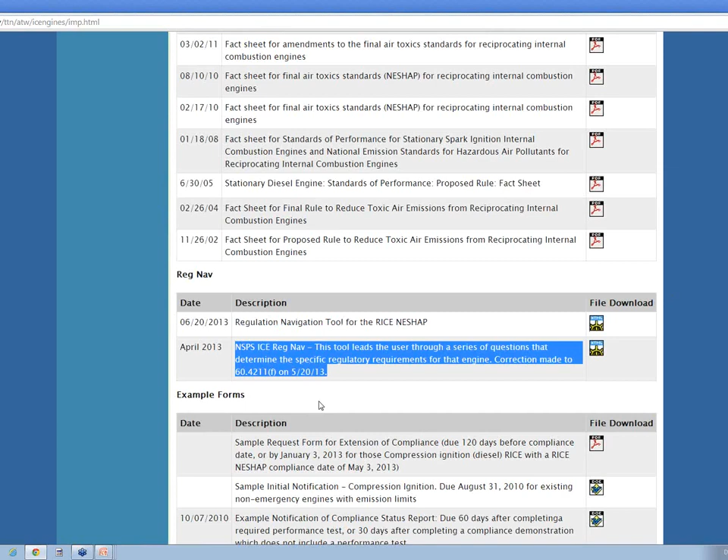And then we have example forms and a lot of other things. Melanie has done some really great Q&A documents. Melanie, you want to chime in and point out where that one is?

We're seeing it right here: implementation questions and answers, how to avoid common testing errors, and then that guidance on the NAICS codes for who's residential, commercial, and institutional is also right there at that same spot. So a wealth of useful information there.

So with that, I think that gives you an idea of the websites and what they can be used for. Susan, are there any other questions that have come up?

Melanie, there were two other questions that came in that we should try and take, and one was a prior question: under the NSPS, what constitutes a major repair or maintenance regarding having to reconduct a performance test?

I think we do refer to a definition that's in the reg text. I don't have it right in front of me, but I believe we say a rebuilt stationary engine means an engine that has been rebuilt, as that term is defined in 40 CFR 94.11(a).